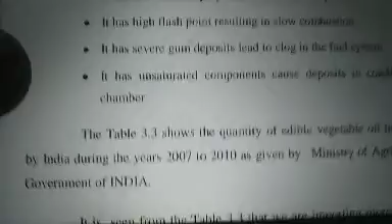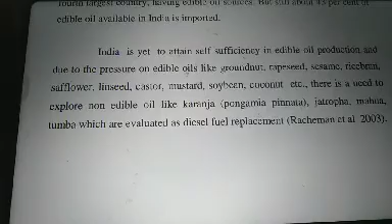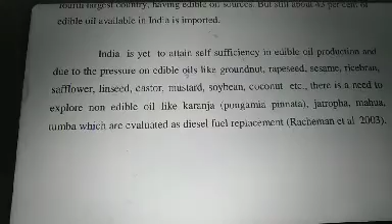India is yet to attain self-sufficiency in edible oil production due to the pressure on edible oils like groundnut, rapeseed, sesame, rice bran, safflower, linseed, castor, mustard, soybean, coconut, etc. There is need to explore non-edible oil like karanja, jatropha, mahua, tumba, which are evaluated as a diesel fuel replacement.

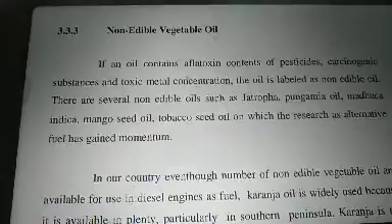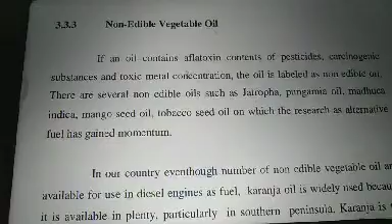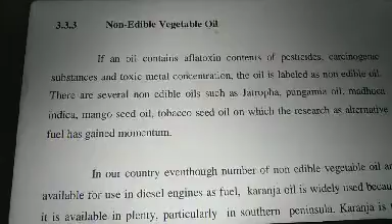Now, non-edible vegetable oils. If an oil contains aflatoxin contents of pesticides, carcinogenic substances and toxic metal concentrations, the oil is labeled as a non-edible oil. There are several non-edible oils such as jatropha, pongamia oil, madhuca indica, mango seed oil, tobacco seed oil, on which researchers as alternative fuel has gained momentum.

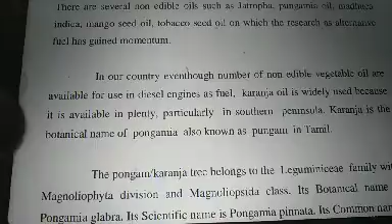In our country, even though a number of non-edible vegetable oils are available for use in diesel engines as a fuel, karanja oil is widely used because it is available in plenty, particularly in the southern peninsula.

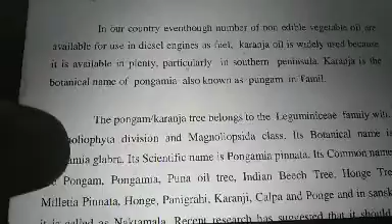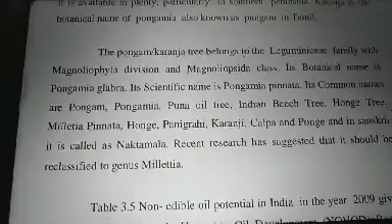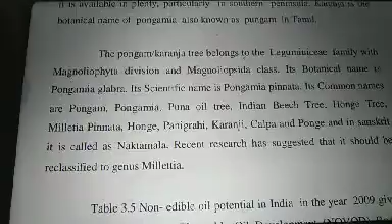Karanja is the botanical name, also known as Pongam in Tamil. Pongam or Karanja trees belong to the Leguminosae family, with the Magnoliophyta division and Magnoliopsida class. Its botanical name is Pongamia glabra, and its scientific name is Pongamia pinnata. Its common names are Pongamia, Puna oil tree, Indian beech tree, Honge tree, etc.

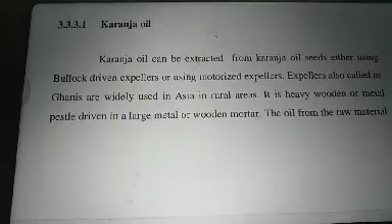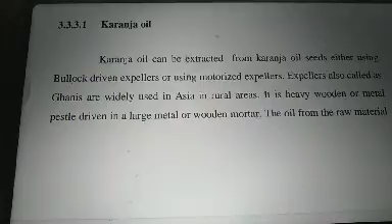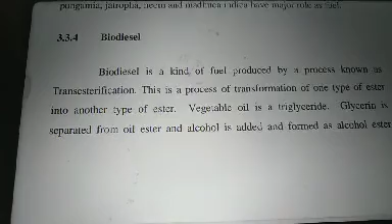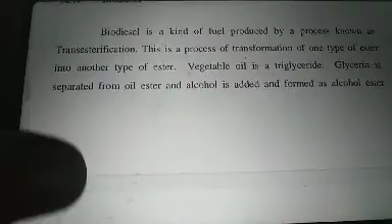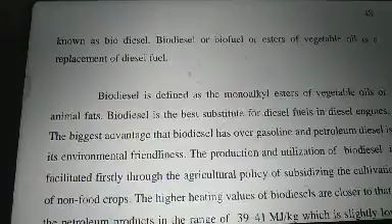Now biodiesel. Biodiesel is a kind of fuel produced by a process known as transesterification. This is the process of transformation of one type of ester into another type of ester. Vegetable oil is a triglyceride; glycerin is separated from the oil ester and alcohol is added, forming an alcohol ester known as biodiesel. Biodiesel, or biofuel, or esters of vegetable oil, is a replacement of diesel fuel.

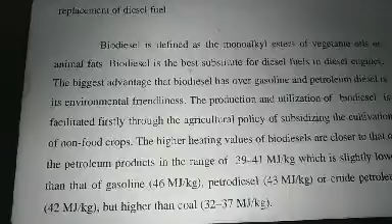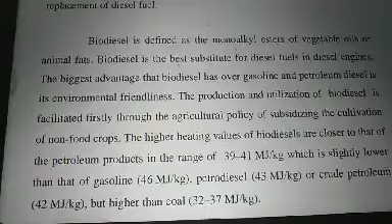Biodiesel is defined as a monoalkyl ester of vegetable oils or animal fats. Biodiesel is the best substitute for diesel fuels in diesel engines. The biggest advantage that biodiesel has over gasoline and petroleum diesel is its environmental friendliness.

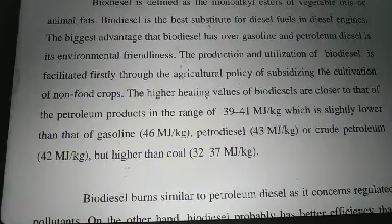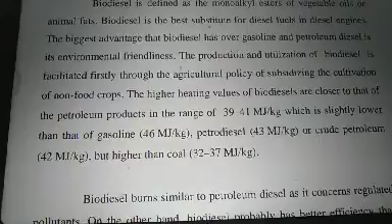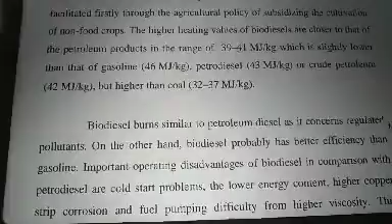The production and utilization of biodiesel is facilitated firstly through agriculture policy and subsidizing the cultivation of non-food crops. The higher heating values of biodiesels are closer to that of petroleum products, in the range of 39 to 41 megajoules per kg, which is slightly lower than gasoline at 46 megajoules per kg, or petrodiesel at 43 megajoules per kg.

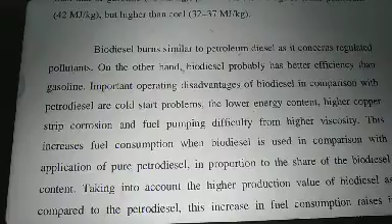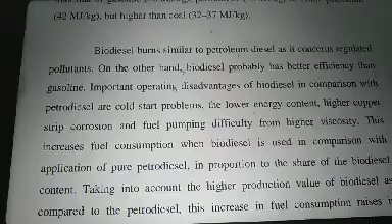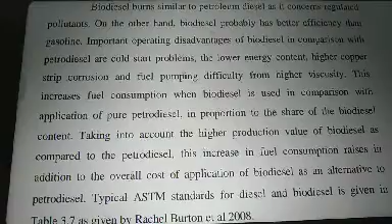The biodiesel burns similar to petroleum diesel as it concerns regulated pollutants. On the other hand, biodiesel probably has better efficiency than gasoline. The important operating disadvantages of biodiesel in comparison with petrodiesel are cold start problems, lower energy content, higher copper strip corrosion, and fuel pumping difficulty from higher viscosity.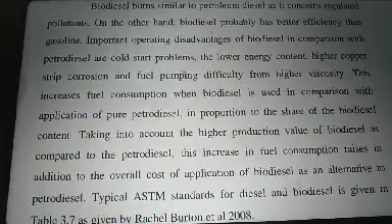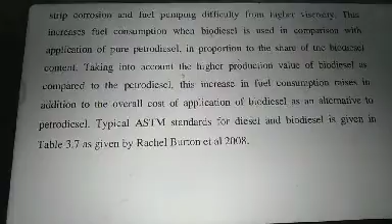This increases fuel consumption when biodiesel is used in comparison with the application of pure petrodiesel, in proportion to the share of biodiesel content, taking into account the higher production value of biodiesel. This increase in fuel consumption adds to the overall cost of using biodiesel as an alternative to petrodiesel.

Typical ASTM standards for diesel and biodiesel are shown in the table.

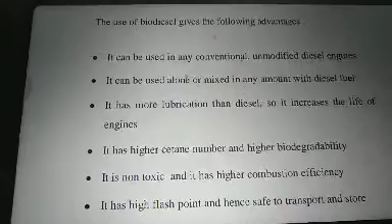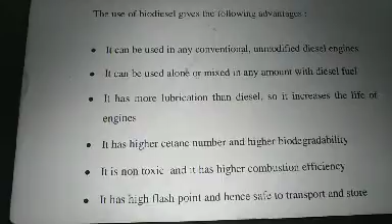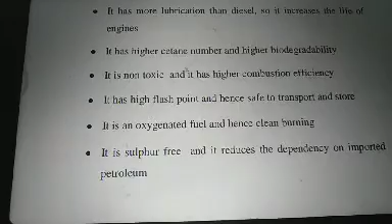Now the advantages of biodiesel: it can be used in any conventional unmodified diesel engine. It can be used alone or mixed in any amount with diesel fuel. It has more lubrication than diesel, so it increases the life of the engine. It has a higher cetane number and higher biodegradability. It is non-toxic and has higher combustion efficiency. It has a high flash point and hence is safe to transport and store.

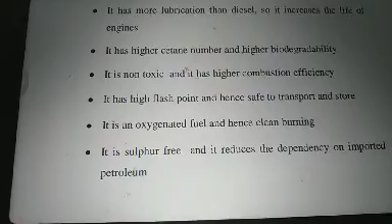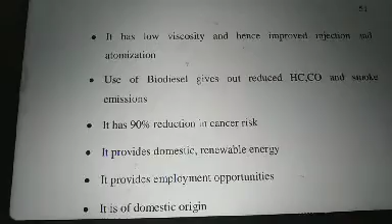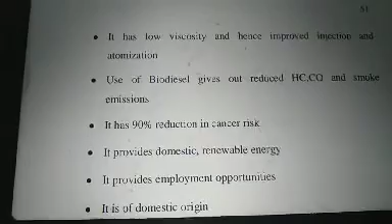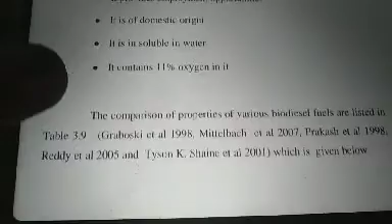It is an oxygenated fuel, hence clean burning is achieved. It is sulfur free and reduces dependency on imported petroleum. It has low viscosity and hence improved injection and atomization. Use of biodiesel gives reduced hydrocarbon, carbon monoxide, and smoke emissions. It has a 90% reduction in cancer risk. It provides domestic and renewable energy and employment opportunities, being of domestic origin. It is insoluble in water and contains 11% oxygen in it.

The comparison of properties of various biodiesel fuels are listed in the table below.

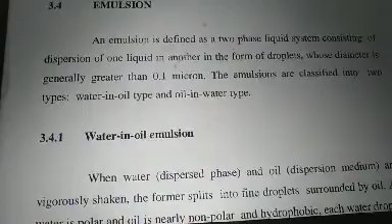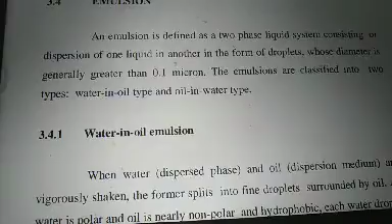Next are emulsions. Emulsion is defined as a two-phase liquid system consisting of dispersion of one liquid in another, in the form of droplets whose diameter is generally greater than 0.1 micron. Emulsions are classified into two types: water-in-oil type and oil-in-water type.

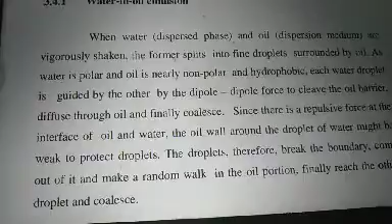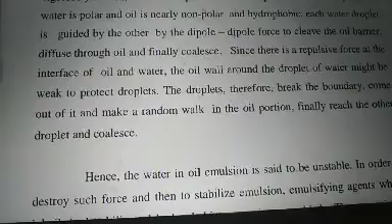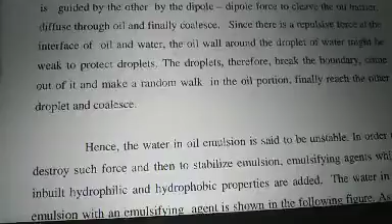When the water dispersed phase and oil are vigorously shaken, the former splits into droplets surrounded by oil. As water is polar and oil is nearly non-polar and hydrophobic, each water droplet is guided by others by dipole-dipole force to cleave the oil barrier, diffuses through the oil, and finally coalesces. Since there is a repulsive force at the interface of oil and water, the oil wall around the water droplet might be weak to protect droplets.

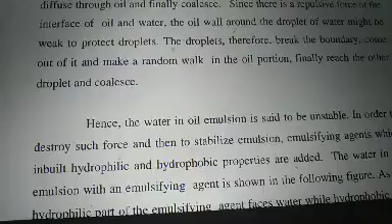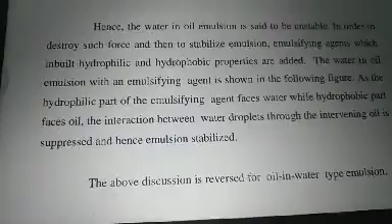The droplets therefore break the boundary, come out of it, make a random walk in the oil portion, and finally reach other droplets and coalesce. Hence, the water-in-oil emulsion is said to be unstable. In order to destroy such force and then stabilize emulsions,

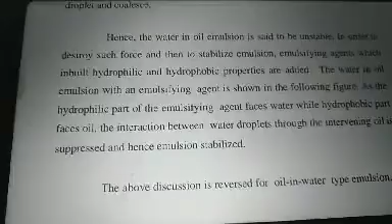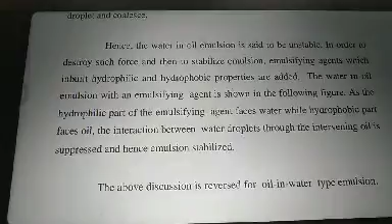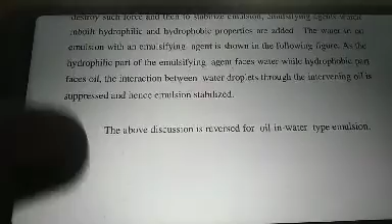emulsifying agents, which have built-in hydrophilic and hydrophobic properties, are added. The water-in-oil emulsion with an emulsifying agent is shown in the following figure. As the hydrophilic part of the emulsifying agent faces water while the hydrophobic part faces oil, the interaction between water droplets through the intervening oil is suppressed, and hence the emulsion is stabilized.

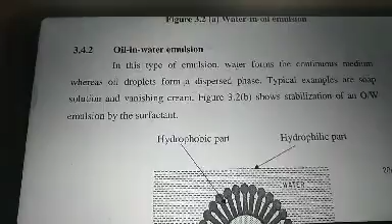Now, oil-in-water emulsion. In this type of emulsion, water forms the continuous medium whereas oil droplets form the dispersed phase. Typical examples are soap solution and vanishing cream.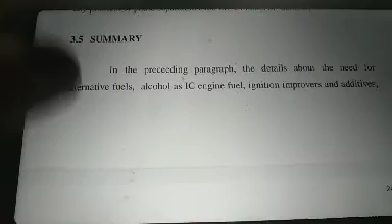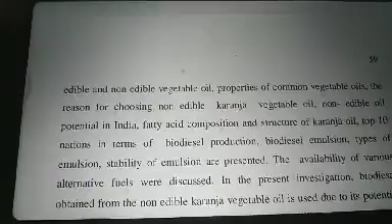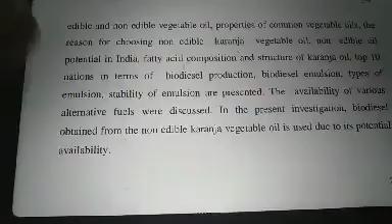Now, summary of the video. In the preceding paragraphs, details about the need for alternative fuel, alcohols as IC engine fuel ignition improvers and additives, edible oil and non-edible vegetable oil, properties of common vegetable oils, the reason for choosing non-edible Karanja vegetable oil, non-edible oil potential in India, fatty acid composition and structure of Karanja oil, top 10 nations in terms of biodiesel production, biodiesel emulsion, types of emulsion, and stability of emulsion are presented.

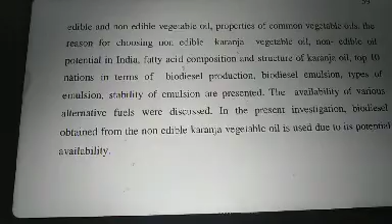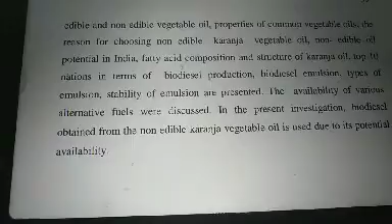The availability of various alternative fuels was discussed previously. Now, in the present investigation, biodiesel obtained from the non-edible Karanja vegetable oil is used for its potential availability. So, this is about the alternative fuels which we should use in the IC engine. Thank you.